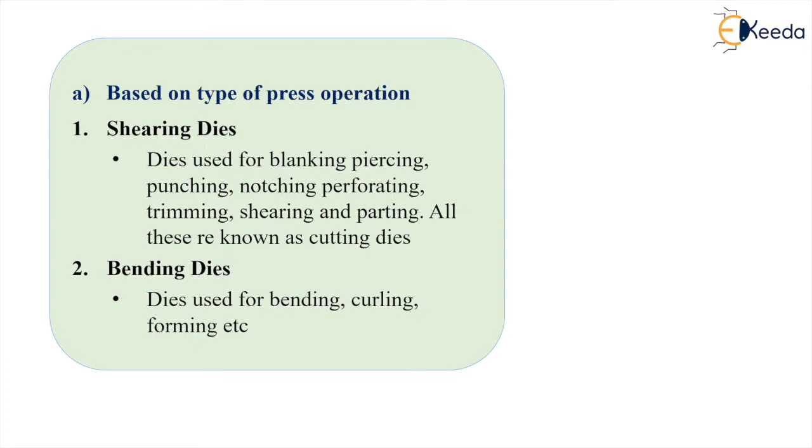Okay, in embossing, so embossing is the operation of giving the impression of the figures or letters or designs on the sheet metal parts. This is embossing. The punch or the die or both of them may have the engravings which are marked on the sheet metal by squeezing and plastic flow of the material. So this is the embossing process.

And in flattening or planishing, it is the operation of straightening, you can say, of the sheet metal which is a curved one.

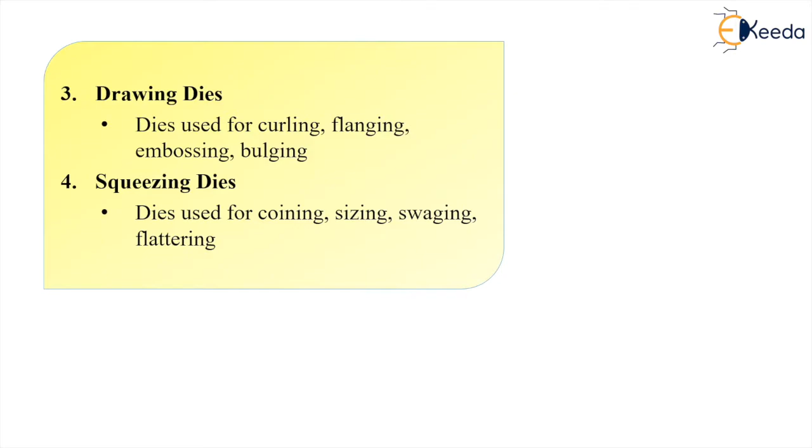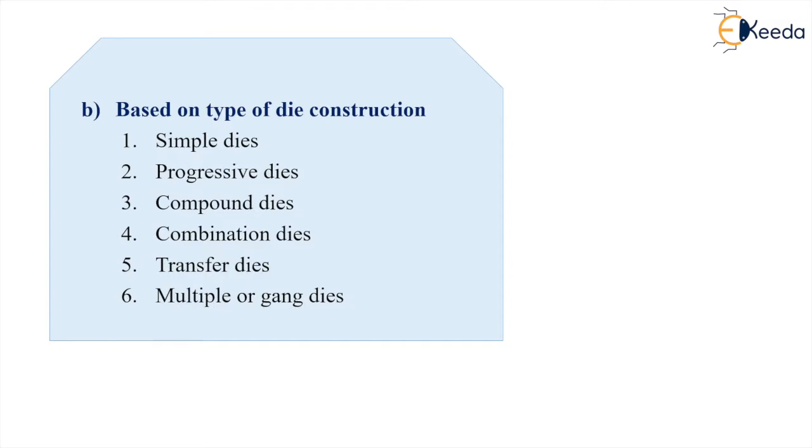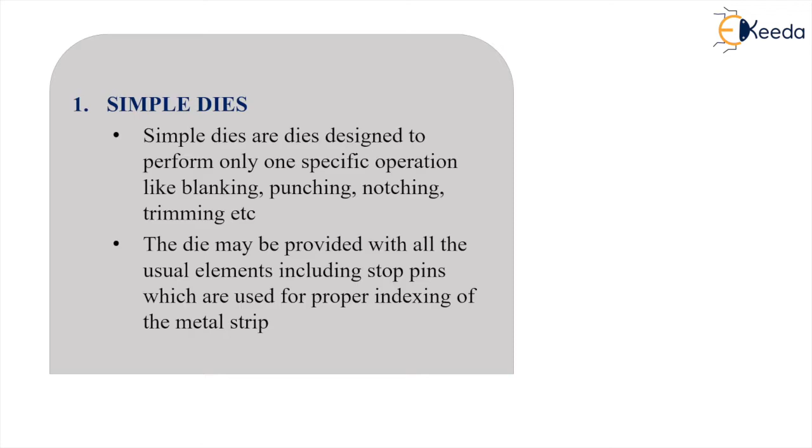Now based on the type of die construction, we are having the simple dies, progressive dies, compound dies, combination dies, transfer dies, and multiple or gang dies. So simple dies are the dies designed to perform only one specific operation, like either blanking, punching, notching, trimming, etc. Only one single operation. The die may be provided with all the usual elements, including stop pins, which are used for proper indexing of the metal strips.

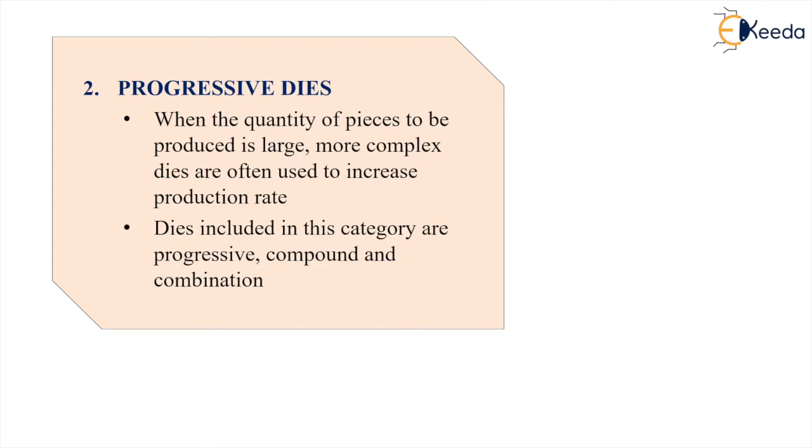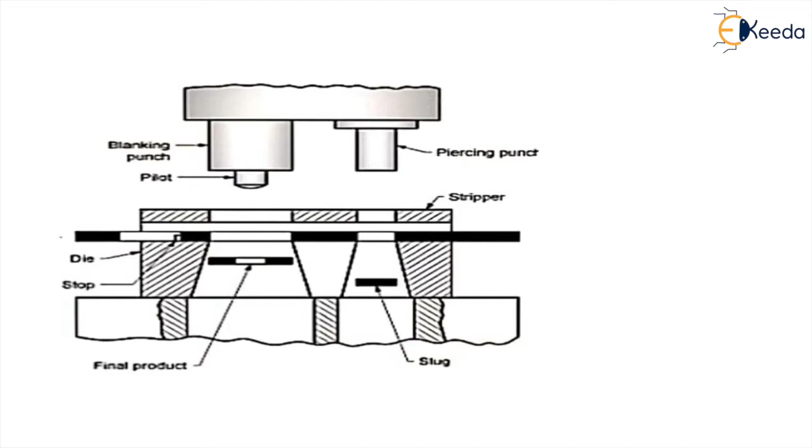now in the second cutting stroke of the ram, the pilot is entering into the pierced hole and correctly locates it, and now the blanking punch descends. This blanking punch will come down and shear the plate to form a washer. Okay, so we have taken one example of the washer making.

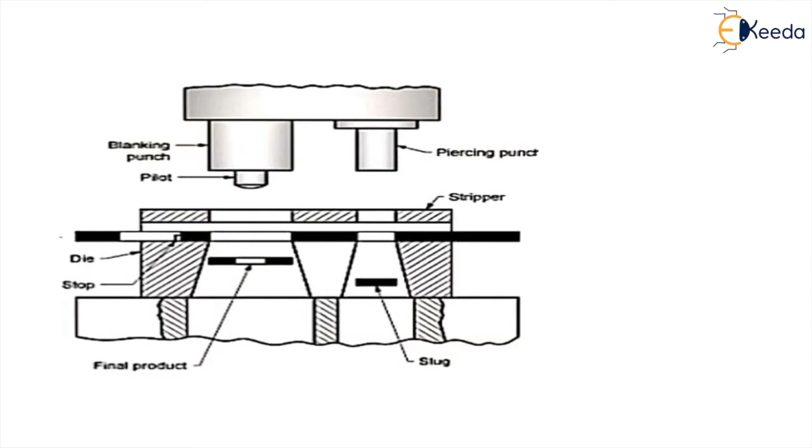So by the time the blanking operation is performed, the hole for the next washer is also pierced at the first station. So here when the blanking operation is going on, at the same time for the next washer the punching or piercing operation is carried out at a single time. Okay, so this is the thing about the progressive die. Okay,

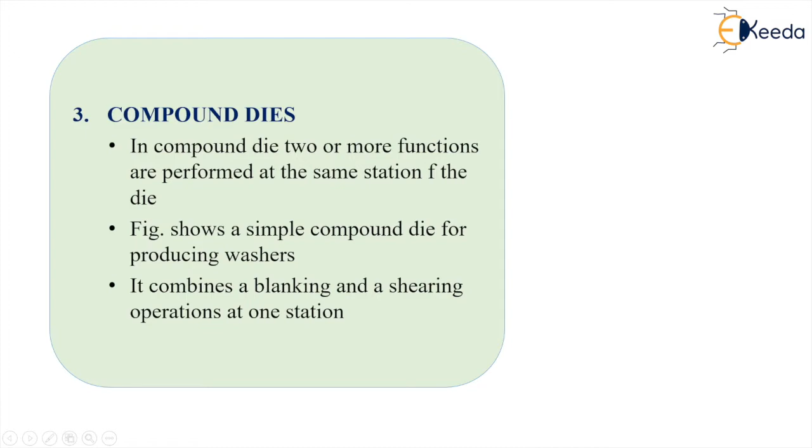now we will see the compound dies. So in compound dies, two or more functions are performed at the same station of the die. So figure shows a simple compound die for producing a washer. The first die was the progressive die. This is the compound die. So here it combines a blanking and shearing operation at one station. Okay,

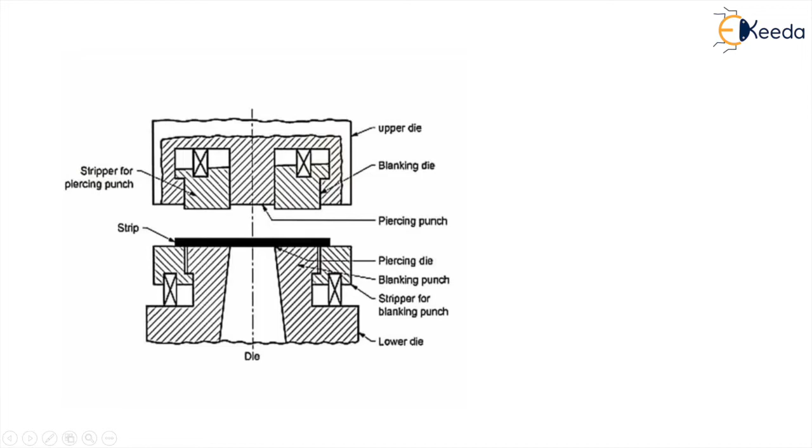so simple definition of compound die is what? So in a compound die, two or more cutting operations are accomplished at one station of the press in every stroke of the ram. It is a compound die. So see here. So this is die and this is the piercing punch. This is the piercing punch and these are the blanking dies. Okay. So here two or more operations are going to perform at a single station of the press.

So here the piercing punch and the blanking die are bolted to the ram. The spring-loaded stripper for the piercing punch is located within the blanking die. The lower die has cutting edges on both sides. Look at the diagram please. The inner edge serves as a piercing die for the piercing punch, while the outer edge serves as a blanking punch.

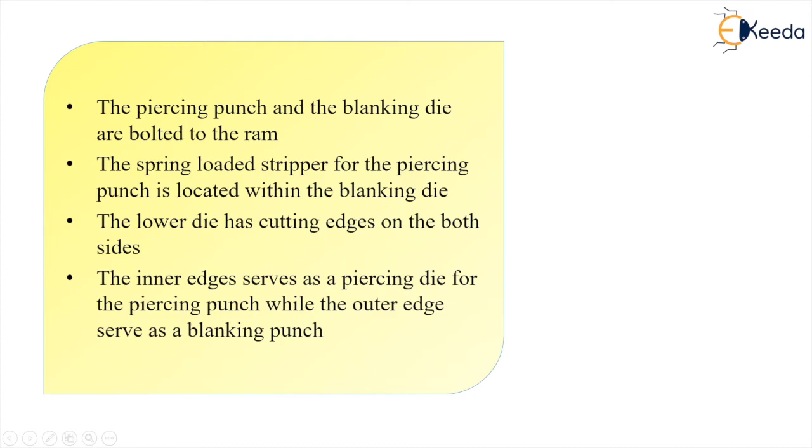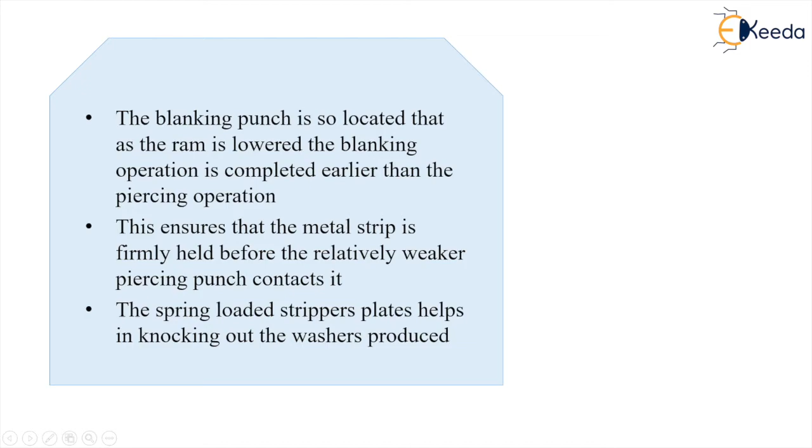The blanking punch is so located that as the ram is lowered, the blanking operation is completed earlier than the piercing operation. This ensures that the metal strip is firmly held before the relatively weaker piercing punch contacts it. The spring-loaded stripper plate helps in knocking out the washer produced. Okay, please understand. See the diagram carefully.

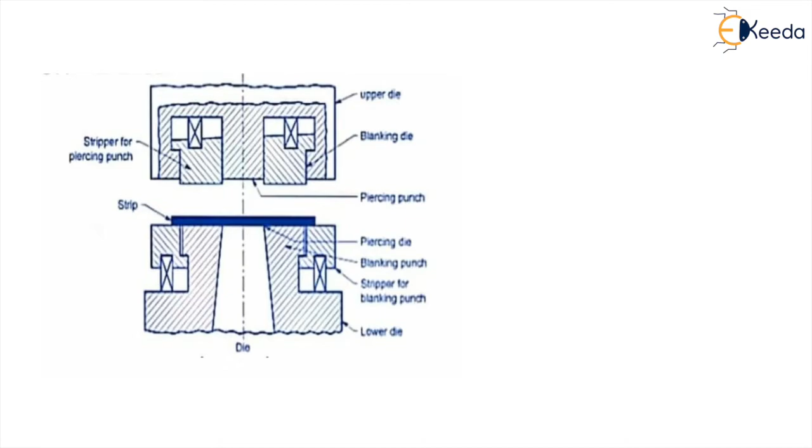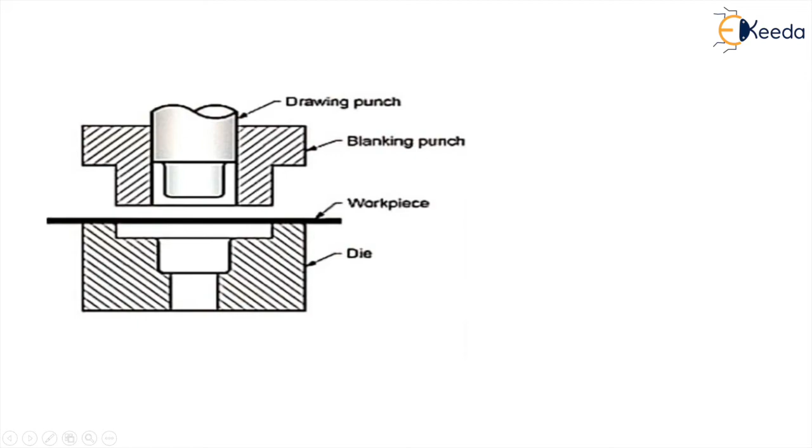So the same thing is written here: as the blanking punch descends, it cuts the blank of the required size from the metal using the outer working surface of the die. The inner drawing punch now descends and draws out the metal to form required parts, while the blanking punch serves as the pressure pad. The drawn cup is then ejected from the die.

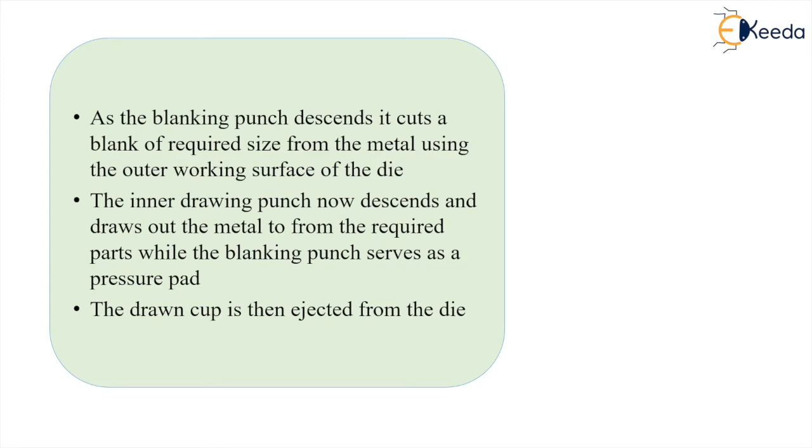See, next we are having the transfer dies. These are similar to progressive dies in that the stock is transferred progressively from one station to the next till at the last station the job is completed. Generally, pre-cut blanks are used in these transfer dies.

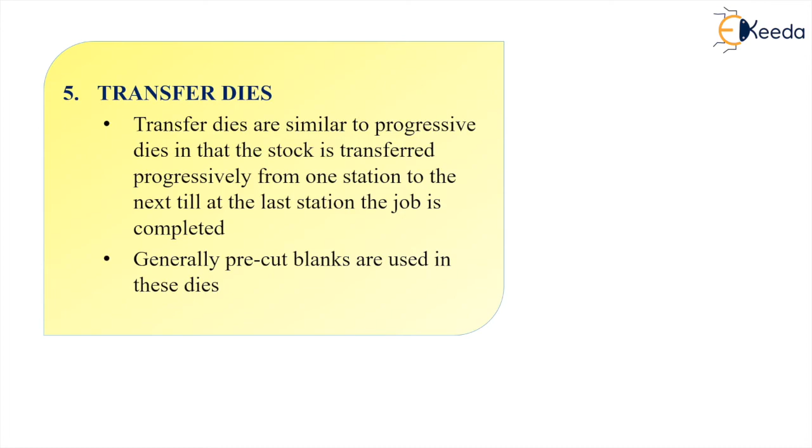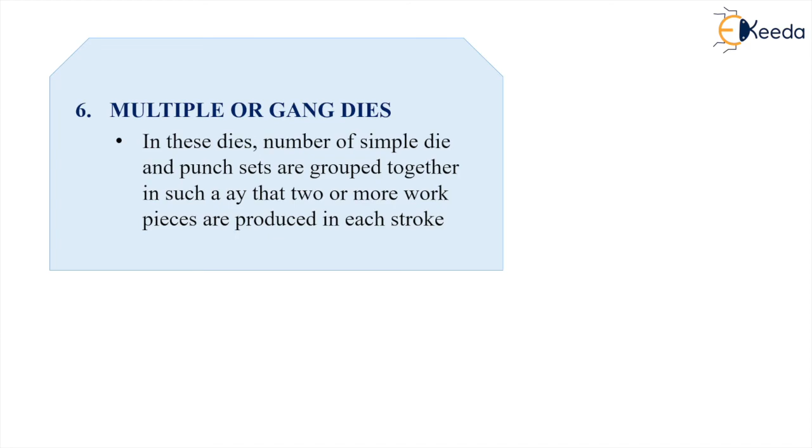But see, when you stagger the length, stagger means minimizing the length of the punches. So when punch one completes its operation, punch two will start its operation. So this is the terminology used for minimizing the load in cutting sheet metal operations. The first methodology is to provide the shear for minimizing the force, and this is another methodology, that is staggering of the punches. It can be well done in progressive dies. Please remember it.

And please remember this also. In progressive dies, blanking is the last operation. Piercing is the first operation. We have seen the example of washer making. In a given sheet, the hole is pierced. Now this is subjected to the second stage, where blanking is done. So we have the washer as the final product.